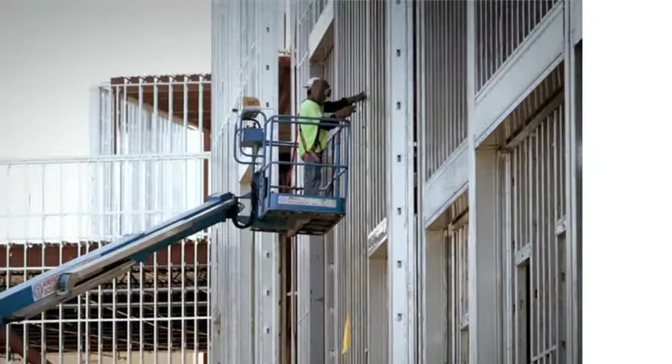Ensuring a safe workplace is a mandated employer responsibility. Under provisions of the Occupational Safety and Health Act, employers must provide workers with an environment free from safety and health hazards. In turn, manufacturing standards for fall protection equipment are established by the American National Standards Institute and the Canadian Standards Association and form the basis for OSHA safety regulations.

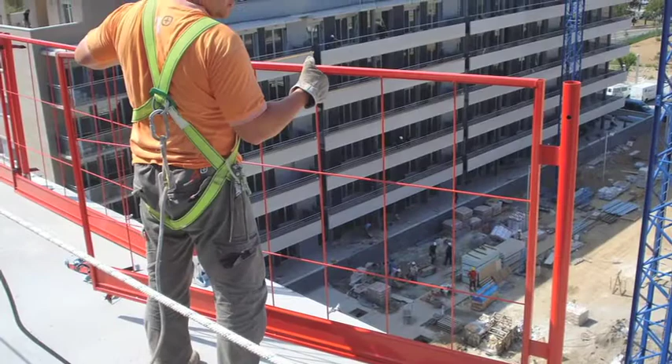Apart from compliance issues, however, the most effective fall protection programs result when employers work closely with workers to identify fall hazards present at a particular site and develop comprehensive safety at height plans and procedures. Even when fall protection measures are in place, it is important to recognize that equipment deteriorates over time, that routine inspection for wear and damage is critical, and that proper training in fall protection and equipment selection are absolutely vital.

A written fall protection safety plan should be created once the specific fall hazards have been identified. The plan should specify what fall prevention or personal protection measures are to be used, and it should also identify who is responsible for implementing the safety measures, including supervision and training. The program needs to be clearly conveyed and understood by all participants.

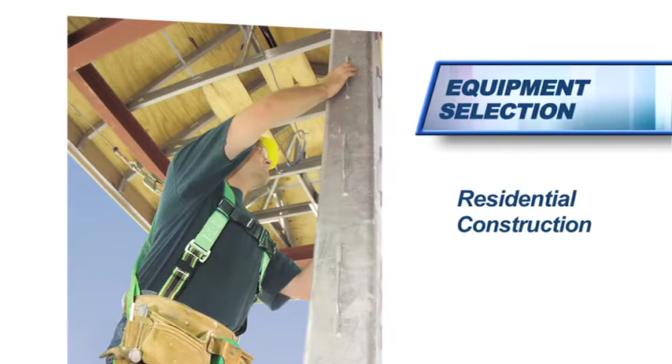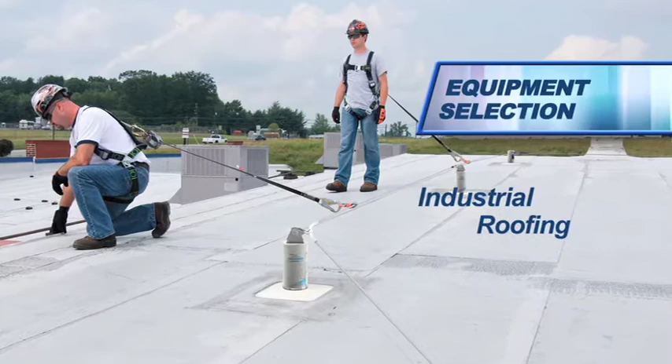Employers should be familiar with the different fall prevention equipment options available and select based on the particular site and type of work being performed. Consultation with safety equipment manufacturers is invaluable in identifying equipment that meets specific worker and job site variables. Because all work environments differ, it is impossible for the manufacturer to determine exactly which safety at height products will provide maximum protection for each job. By understanding how fall prevention and protection equipment operates and knowing the differences in product functions, the employer can select equipment that is best suited for its workers.

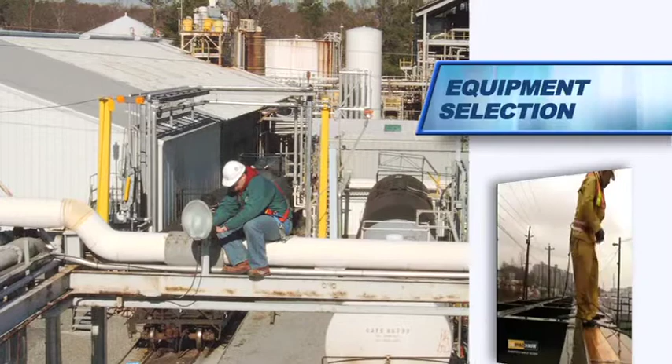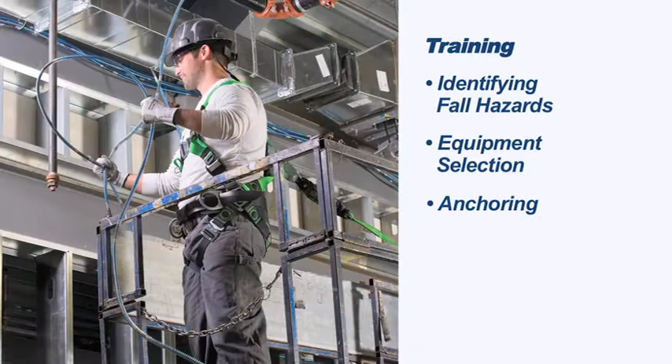Every worker must be trained in the proper use of appropriate fall prevention or personal protection equipment. Training should include identifying fall hazards, selecting appropriate equipment, following proper anchoring procedures, and using equipment properly. Workers should also learn how to inspect and maintain equipment.

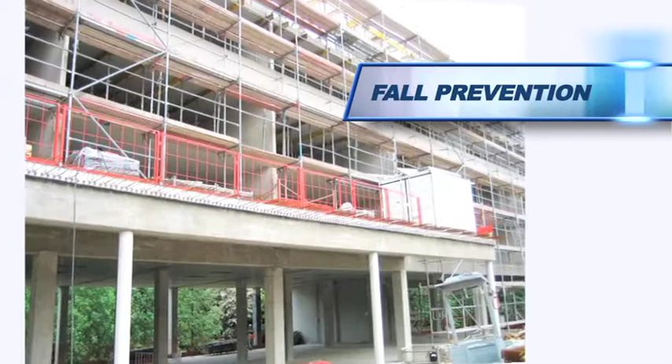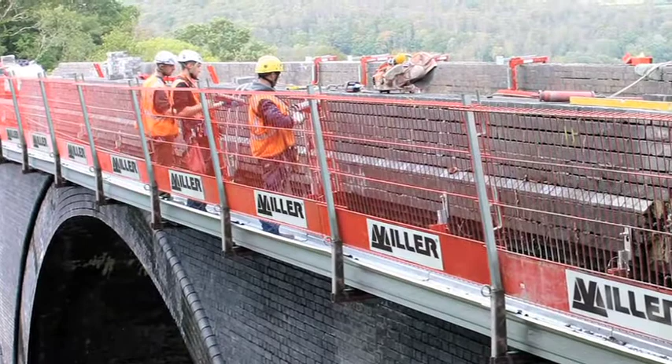Fall prevention, fall arrest, positioning and restraint, suspension and retrieval are the basic categories encompassing types of fall protection equipment. Fall prevention measures entail the installation of permanent or temporary barrier or guardrail systems that simultaneously protect multiple workers. This category of collective systems is typically used in building construction and other elevated areas where workers are exposed to leading edge decks, unprotected roof edges, elevator shafts, floor hatchways, chutes, or wall openings.

Fall arrest equipment, or personal fall arrest systems, is comprised of three components that are often referred to as the ABCs of fall protection. These are anchorage connector, body wear, and connecting device. Used properly, a fall arrest system does not prevent a fall, but rather suspends a worker in the event of a fall and prevents impact with a lower obstruction or the ground.

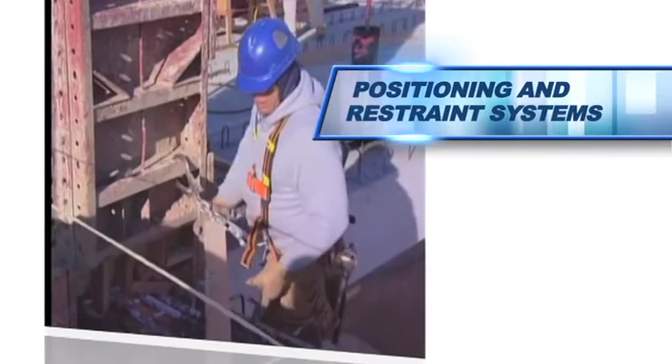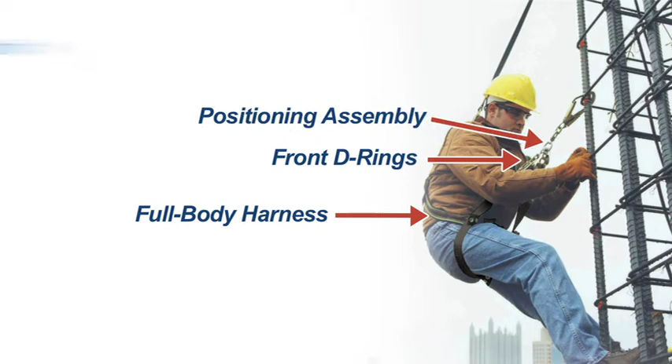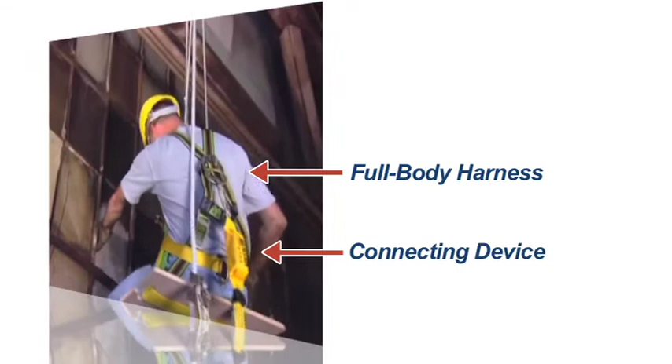Positioning and restraint systems hold a worker in place, allowing a hands-free workspace, or restrict a worker's movement in proximity to a fall hazard. A typical system consists of a full body harness with side or front D-rings, a positioning assembly, and an attachment point. Suspension systems enable workers to be lowered and supported to accomplish hands-free tasks such as building maintenance functions. Typical components include a full body harness, a connecting device or work line, a suspension device such as a chair or sling, and an attachment point.

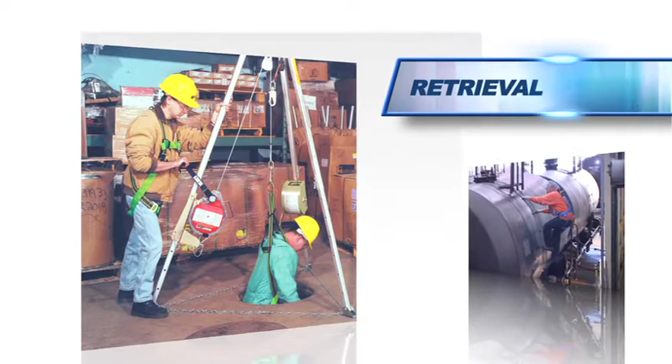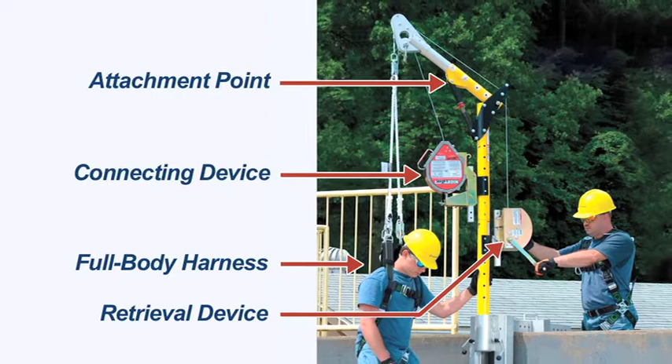Retrieval systems are used in storage tanks, manholes, and other confined space applications. The system includes a full body harness, a retrieval device, a connecting device, and an attachment point such as a tripod or DuraHoist system. The three key components of the personal fall arrest system must be in place and properly used to provide maximum worker protection: anchorage connector, body wear, and connecting device.

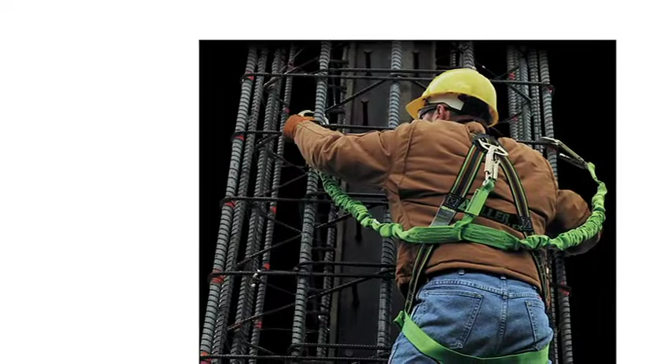An anchor point is a structural item such as an I-beam, scaffold, rebar, or lifeline to which workers are affixed when a fall hazard is present. It is sometimes referred to as a tie-off point. Anchor points must be carefully selected since their strength and stability are depended upon in case of a fall. To avoid a dangerous swing fall, workers should always try to connect and work directly underneath an anchorage point whenever possible.

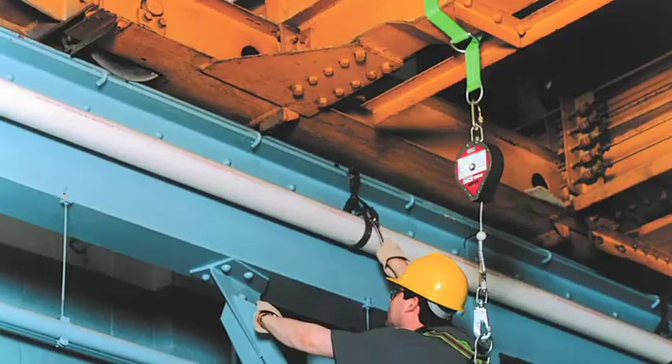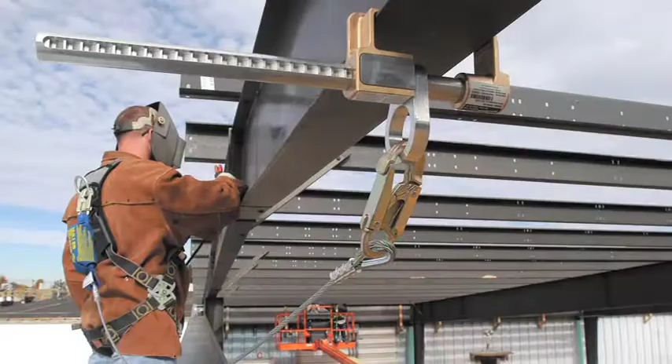An anchorage connector is an intermediary fall protection device, such as a cross-arm strap, D-bolt, or rope grab, that links the worker to the anchor point. Anchorage connectors are offered in a variety of configurations to accommodate vertical or horizontal connections for attachment to concrete substrates, large and small beams or scaffolding, rooftops, and structural steel. Some anchorage connectors are built into connecting devices. These tie-back anchorage connecting devices will be addressed in detail later. The only form of body wear acceptable for fall arrest is the full body harness.

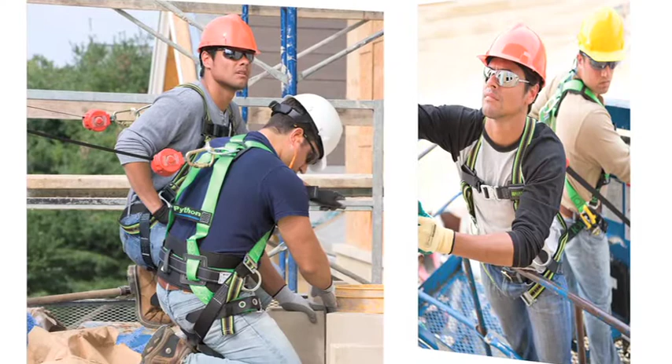The harness style should be selected based on the type of work being performed and the overall work environment. The full body harness offers an inherently high safety factor, since fall forces are distributed throughout the body over many webbing components, including chest, shoulder, waist, and legs.

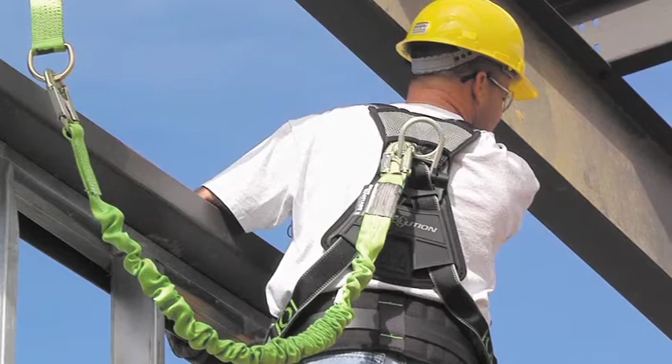In addition to distributing forces throughout the body, a properly fitted full body harness keeps the worker suspended upright while awaiting rescue. This is due to the sliding back D-ring, which slides along the webbing to the back of the neck once a fall occurs. OSHA states that potentially fatal suspension trauma can occur within minutes while waiting for rescue after a fall. Average fall rescue time is 15 minutes.

When used, the Miller Relief Step Safety Device provides support and enhances blood circulation until rescue, permitting the ability to move and flex leg muscles. Small and lightweight, the Relief Step Safety Device attaches to any brand of full body harness. Utilizing 2 Miller Relief Steps, one for each leg, assures greater comfort until rescue is completed.

While safety directors agree a comfortable harness fit is crucial to compliance, some workers lose sight of how important it is to follow directions when it comes to ensuring a snug fit with chest and leg strap adjustments and back D-ring positioning. In order to ensure proper protection, the full body harness must be worn properly. A simple 6-step guide can be followed that could save your life.

Hold the harness by the back D-ring and shake to allow any tangled straps to fall into place. Unbuckle chest, leg, and waist straps. If the harness has a belt, unbuckle it too. Slip the straps over the shoulders so the back D-ring is located in the middle of the back between the shoulder blades. Pull the end of one leg strap between the legs and secure to the opposite end. Repeat this step with the other leg.

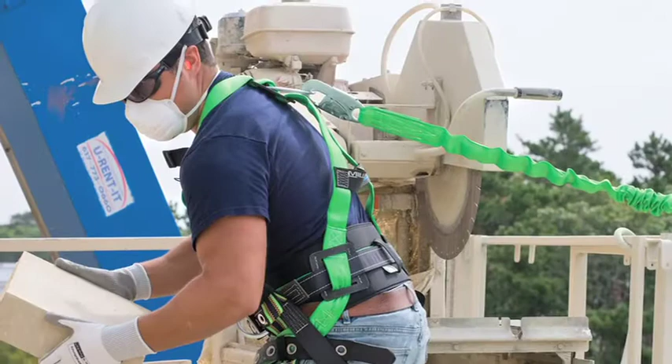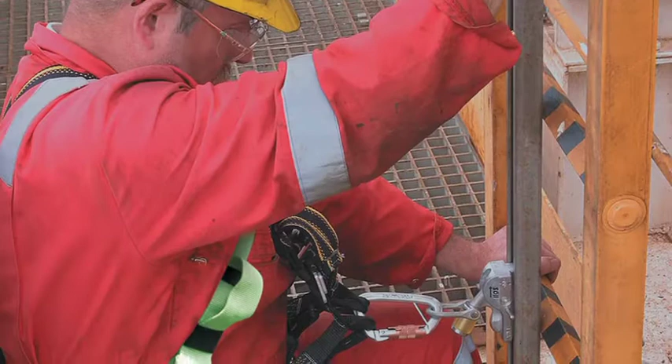Appropriate harness sizing influences compliance. Manufacturers offer various sizes as well as an array of styles for specific industries or activities. Side and front D-rings are typically used for positioning only. However, front D-rings or web loops can be used for ladder climbing and rescue.

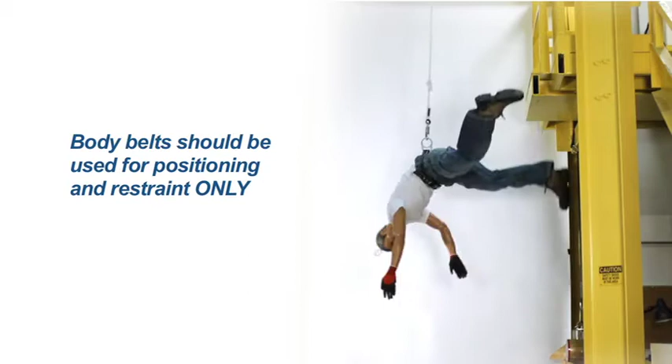Body belts should be used for positioning and restraint only. Most regulations prohibit their use for fall arrest. Body belts do not distribute fall forces, but concentrate arresting shock in the abdomen, resulting in serious internal injuries.

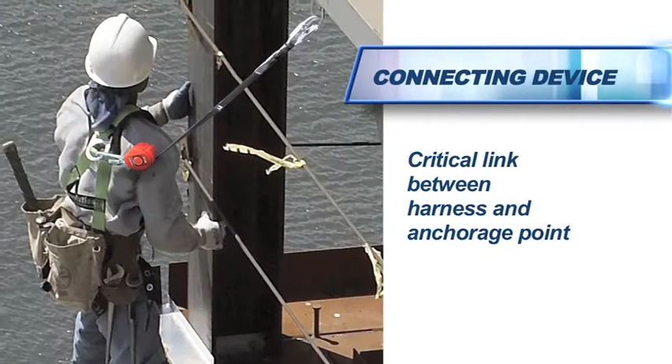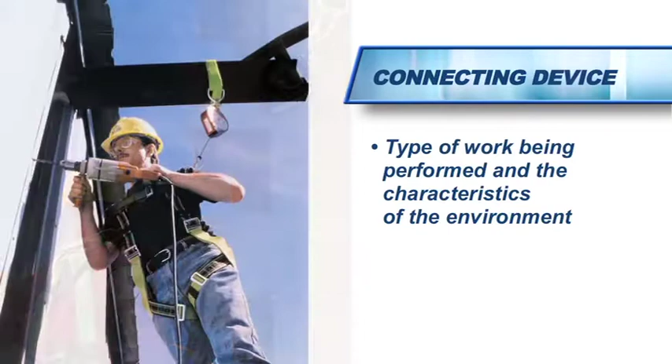A connecting device is the critical link between the harness and the anchorage point. The connecting device manages the greatest forces during a fall. Connecting devices should be selected according to these criteria: type of work being performed and the characteristics of the environment, such as the presence of moisture, dirt, oil, grease, and electric hazards, as well as the ambient temperature.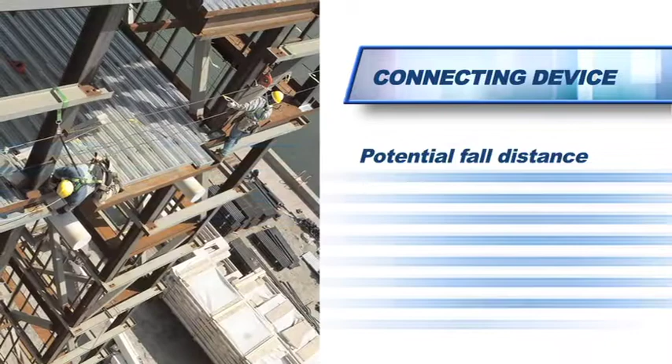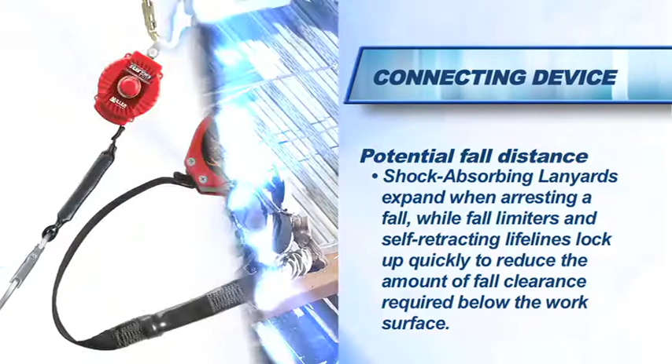Potential fall distance. Shock-absorbing lanyards expand when arresting a fall, while fall limiters and self-retracting lifelines lock up quickly to reduce the amount of fall clearance required below the work surface. A personal fall arrest system should be designed and tested as a complete system. Components produced by different manufacturers may not be interchangeable or compatible.

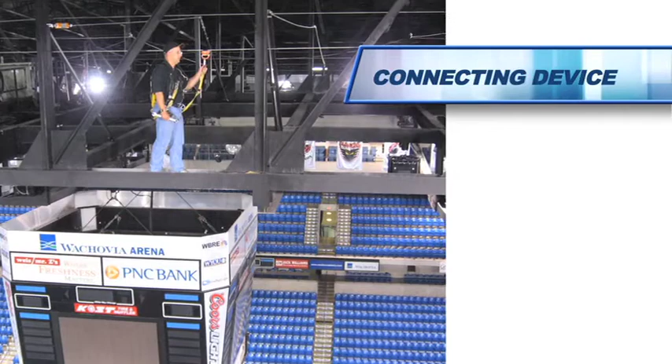Selection criteria should also include a close look at product quality. For example, OSHA regulations call for limiting fall forces on an individual wearing a full body harness to 1,800 pounds. Most reputable lanyard manufacturers state maximum arrest force on the label of the lanyard.

While OSHA regulations are the law and are enforced by a federal agency, ANSI standards are self-enforced by individual manufacturers. There is no enforcement body and no inspectors. The buyer cannot take stated performance per ANSI guidelines for granted. Always check with the manufacturer for documented proof.

When attaching the connecting device to the harness, attach to the back D-ring only. If other D-rings are integrated on the harness, their use is for positioning or restraint. Shock-absorbing lanyards are required for a fall arrest system. Non-shock absorbing lanyards are for positioning and restraint only.

While both will arrest a fall, the maximum arresting forces when used together with a full body harness need to be less than 1,800 pounds. This is extremely difficult to achieve using a lanyard without a shock absorber. A test fall of a 220-pound mannequin dropping 6 feet with and without a shock absorbing lanyard demonstrates the forces on the body.

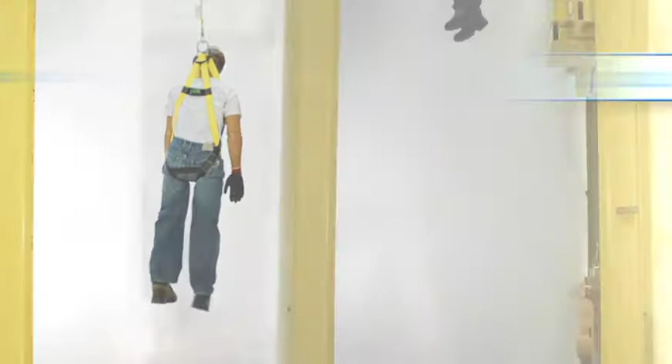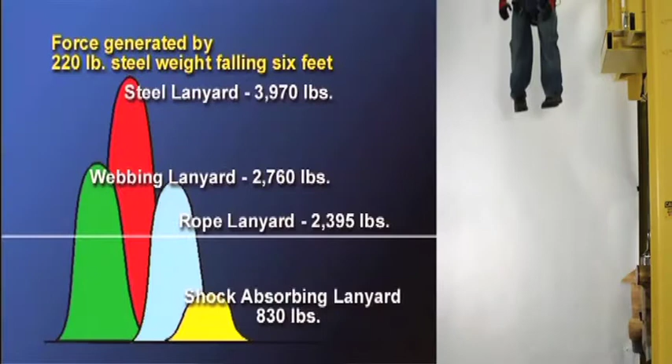Without shock absorption, forces exceed 3,000 pounds, causing the head to snap back and the body to bounce at the instant of arrest. With a shock-absorbing lanyard, deceleration is much smoother and more controlled, and fall forces are contained to 900 pounds.

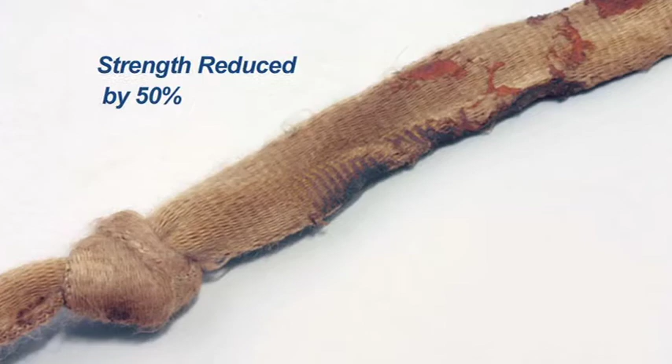Shock-absorbing lanyards feature pack or tubular designs, specially woven inner cores that smoothly expand to reduce fall arrest forces. Lanyards are available in steel, rope, and webbing. Never tie a knot in any web or rope lanyard. It reduces the strength by 50%.

Double-leg shock-absorbing lanyards provide 100% tie-off fall protection. If one leg is not used, it should be connected to a pull-free lanyard ring on the harness and never be attached to any permanent fixture on a harness such as a side D-ring. All Miller brand harnesses include pull-free lanyard rings, designed for storing a lanyard or extra lanyard leg when not in use.

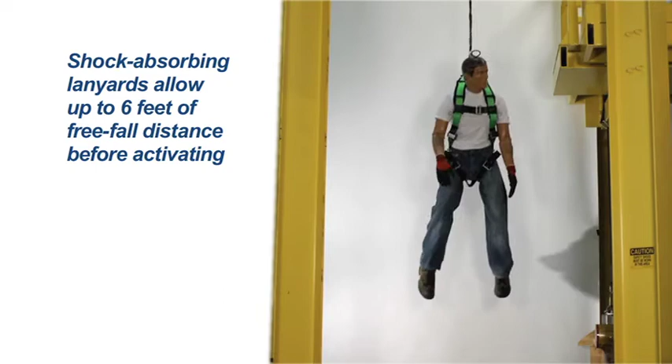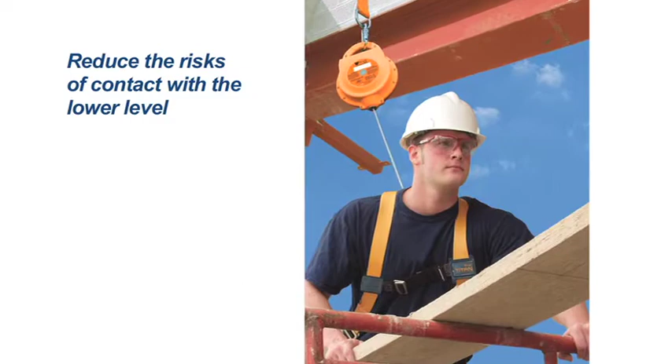Fall limiters and self-retracting lifelines, sometimes referred to as retractables, yo-yos, and seat belts, are approved alternative connecting devices to shock-absorbing lanyards. While traditional shock-absorbing lanyards allow up to 6 feet of free fall distance before activating, self-retracting lifelines require less than 2 feet. Shorter activation and arrest distances reduce the risks of contact with the ground or lower level obstructions and allow for easier rescue in the event of a fall.

Fall limiters and self-retracting lifelines are available with working lengths ranging from 6 to 175 feet. Self-retracting lifelines are durable, heavy-duty devices that have webbing or cable wound on a brake drum that extends as the worker moves away from the anchor point and retracts as he nears the anchor point.

Personal fall limiters are lightweight web connectors that require less fall clearance and offer optimal mobility while preventing tripping hazards. They may be attached directly to the back D-ring or used as a traditional retractable lifeline. Double leg units are also available for 100% tie-off fall protection.

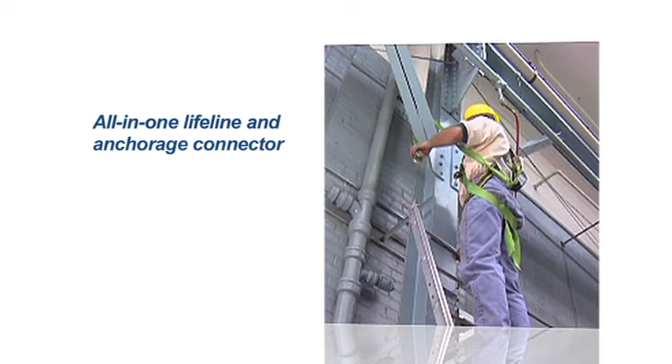Tie-back lanyards are a type of connecting device available as a lanyard or personal fall limiter that have a special snap hook and high-strength webbing that is designed to tie back anywhere along the lifeline. This all-in-one lifeline and anchorage connector increases safety and reduces equipment required on the job site. Only special snap hooks and webbing designed for use with tie-back lanyards are acceptable.

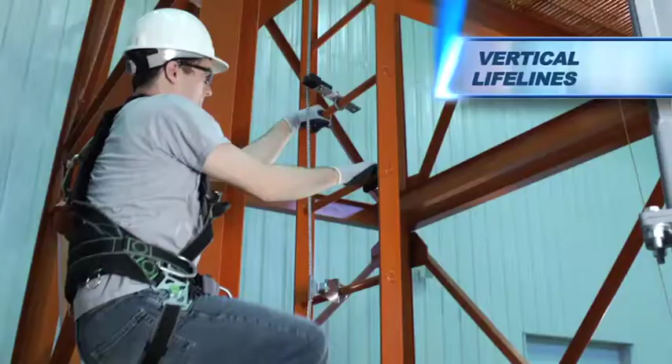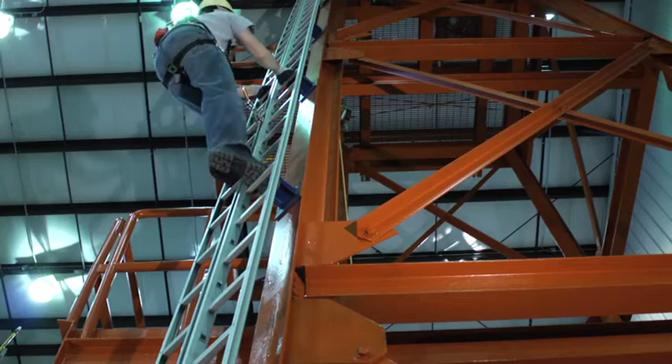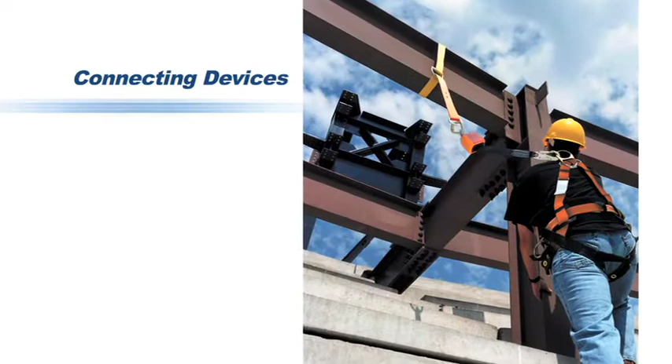Vertical lifelines are connecting devices available as rope or cable and used in conjunction with rope or cable grabs. These grabs are designed for hands-free operation, easily sliding up or down a lifeline as the worker moves, but instantly locking in place in the event of a fall. Common applications include roofing, window washing, and fixed ladder climbing. Connecting devices are the most critical components in surviving a fall and must be carefully chosen, properly used, and routinely inspected to ensure optimal performance and worker safety.

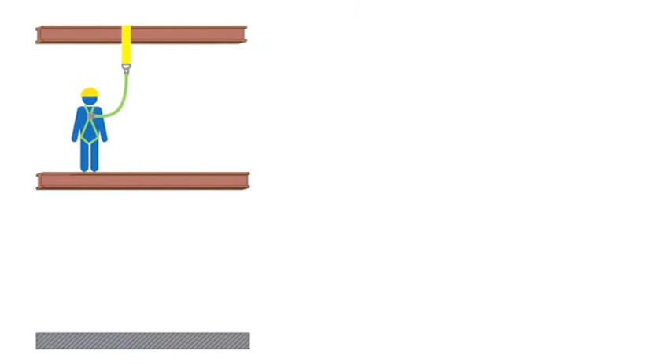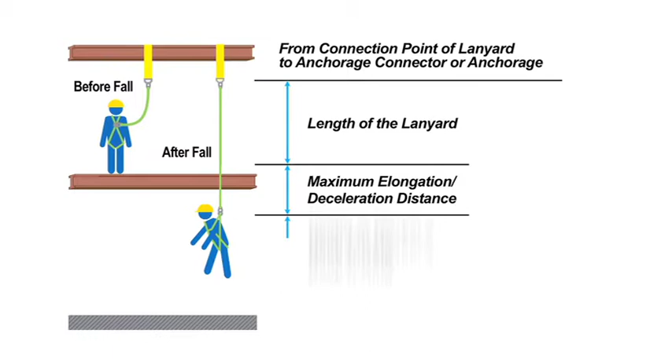Fall clearance calculations are vital in selecting proper anchorage points and connecting devices, and to avoid striking a lower level or obstruction in the event of a fall. Free fall distance should be limited to the shortest distance possible. This is never more than 6 feet when using a shock-absorbing lanyard, unless using equipment designed specifically for free falls over 6 feet. When calculating fall clearance required for a shock-absorbing lanyard, the following variables must be considered: the original length of the lanyard, the maximum elongation after shock absorber deployment, the height to the worker's back D-ring, and a safety factor of 3 feet.

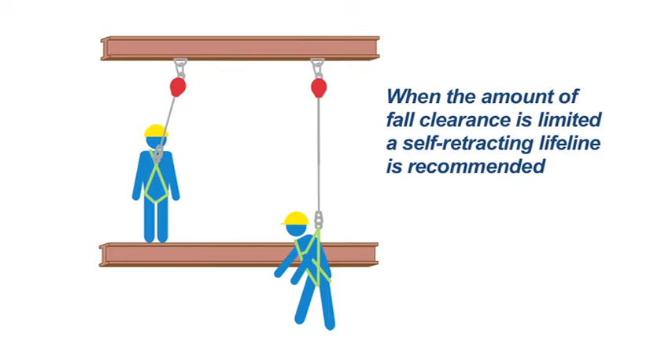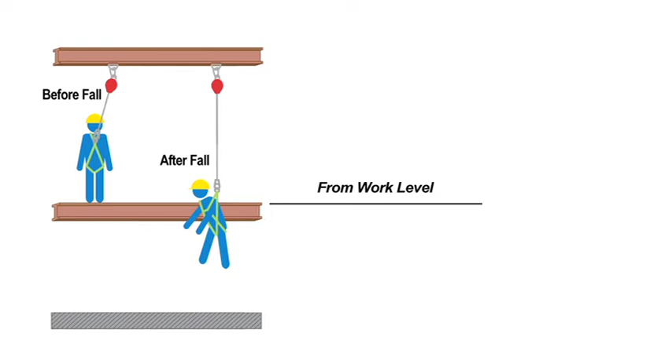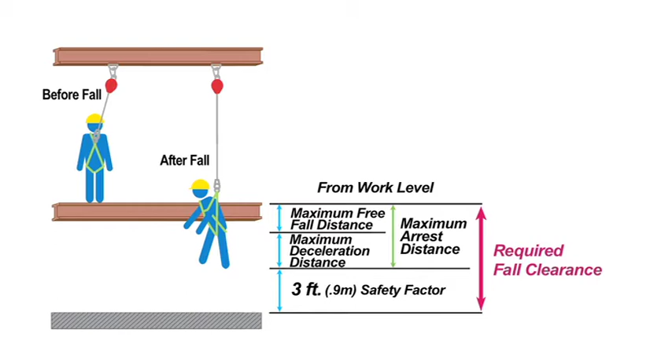When the amount of fall clearance is limited, a self-retracting lifeline is recommended. Some retractables require as little as 5 feet of fall clearance from the work surface to the next lower level or obstruction. While fall clearance is calculated from the anchorage point for a shock-absorbing lanyard, fall clearance for a self-retracting lifeline is often calculated from the work level. When calculating fall clearance for a self-retracting lifeline from the work level, the following must be considered: maximum fall arrest distance and a safety factor of 3 feet. Always know your fall clearance when selecting your connecting device.

To maintain service life and high performance, each harness and connecting device should be visually inspected before each use and regularly inspected by a competent person as defined by OSHA. Following these instructions may still necessitate removing the harness or connecting device from service prior to the expiration of the 5-year life expectancy guideline. Likewise, proper adherence to the inspection and maintenance criteria may extend the useful life beyond 5 years. Ultimately, it is the responsibility of the end user to determine when a harness or connecting device is unfit for use and should be removed from service. When not in use, products should always be stored at room temperature, away from chemicals, moisture, and ultraviolet light.

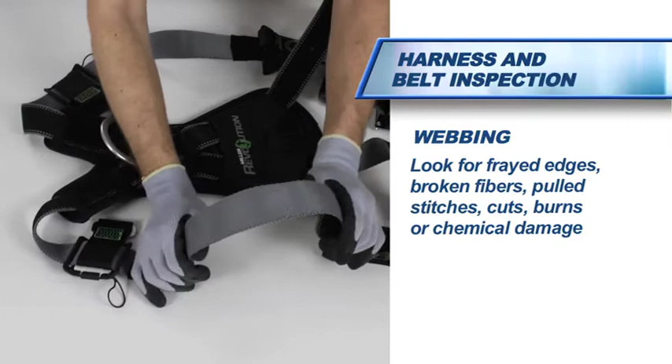To maintain proper service life and high-performance fall protection equipment, anchorage connectors, body wear, and connecting devices must be inspected regularly. Grasp the harness webbing with hands 6 to 8 inches apart. Bend the webbing in an inverted U as shown. Surface tension on the webbing will reveal damaged fibers or cuts. Follow this procedure for the entire length of the webbing on both sides, looking for frayed edges, broken fibers, pulled stitches, cuts, burns, or chemical damage.

Check the D-rings and other metal parts for corrosion, distortion, cracks, breaks, and rough or sharp edges. The D-ring should pivot freely. Inspect for any unusual wear, frayed or cut fibers, or broken stitching of the D-ring attachments. Pads should also be inspected for cracks, excessive wear, or other signs of damage. Inspect buckles for unusual wear or distortion, fibers around buckle attachments, or distortion.

Mating and friction buckles should not be bent or distorted. The outer and center bars must be straight. Tongue buckles should be inspected for heavy wear, especially loose, broken, or distorted grommets. Webbing should not have additional punched holes. The tongue should overlap the buckle frame and move freely.

Quick connect buckles must be free of debris and engage properly. The outer and center bars must be straight. Inspect fall arrest indicators located on the back D-ring pad for signs of activation. Remove from service if broken or stretched between any of the pairs of arrows.

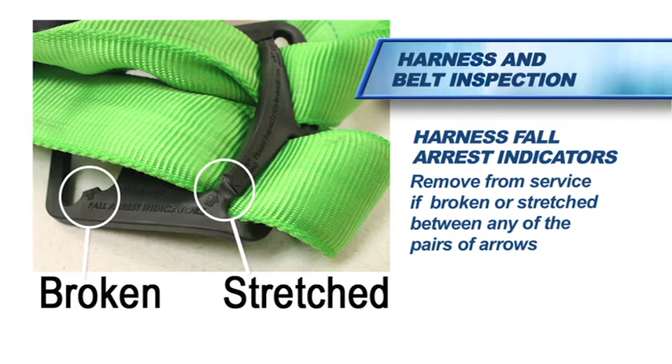When inspecting lanyards, work from one end to the other using a slow rotation. Check snap hooks for cracks, corrosion, or distortion. Keeper springs must have sufficient force to close firmly. The snap hook locking mechanism should keep the hook's gate securely locked.

Thimbles must be firmly seated in the eye of the splice, not displaying any loose or cut strands. There should be no sharp edges, distortion, or cracks around the edges of the thimble. Always wear gloves when inspecting a wire rope lanyard. While rotating, watch for cuts, frayed areas, or unusual wearing patterns on the wire.

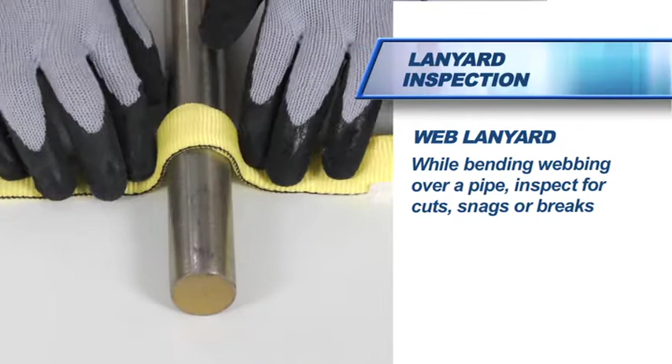While bending webbing over a pipe, inspect for cuts, snags, or breaks. Swelling, discoloration, cracks, and charring are obvious signs of chemical or heat damage. Look closely for any breaks in stitching and inspect the lanyard warning flag for signs of activation.

When inspecting a rope lanyard, rotate the entire length while looking for fuzzy, worn, broken, or cut fibers. Diameter of the rope must be uniform. Outer portions of the pack should be examined for burn holes and tears. Stitching at attachment points must be free from loose strands, rips, deterioration, or other signs of activation.

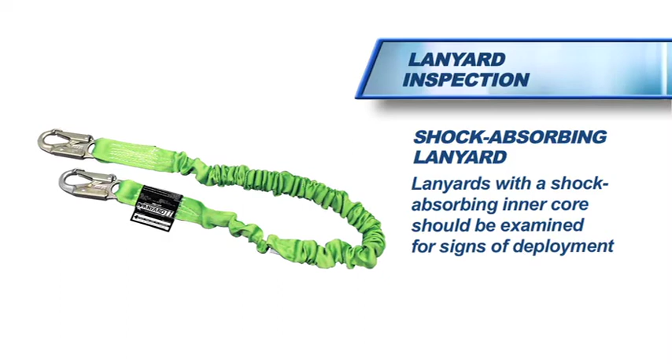Lanyards with a shock-absorbing inner core should be examined for signs of deployment. A warning flag will indicate if the product has been used to arrest a fall. If the flag has been activated, it must be removed from service.

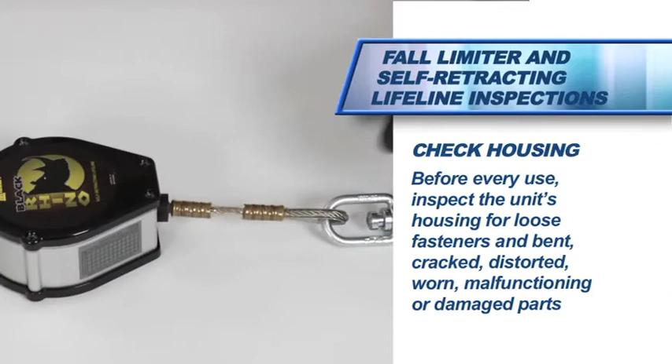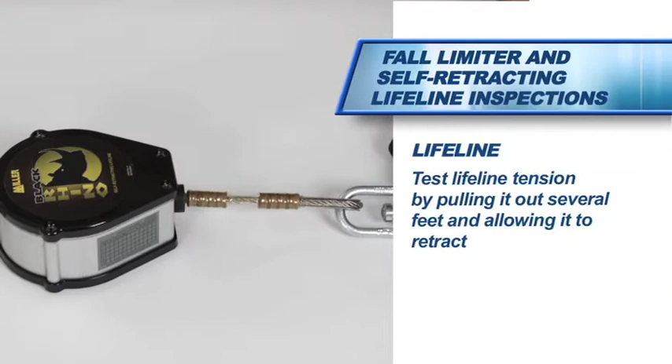Before every use, inspect the unit's housing for loose fasteners and bent, cracked, distorted, worn, malfunctioning, or damaged parts. Test lifeline tension by pulling it out several feet and allowing it to retract. The lifeline should pull out freely and retract all the way back into the unit. Do not use the unit if the lifeline does not retract.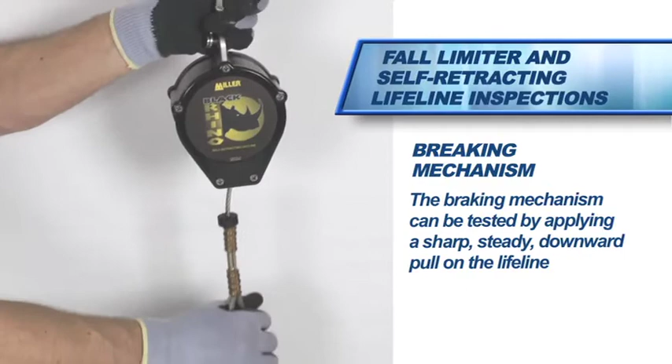The lifeline must be checked regularly for cuts, burns, corrosion, kinks, frays, or other signs of wear. The braking mechanism can be tested by applying a sharp, steady downward pull on the lifeline. There should be no slippage, and when tension is released, the brake should disengage and the lifeline should retract into the housing. Do not use the unit if the brakes do not engage.

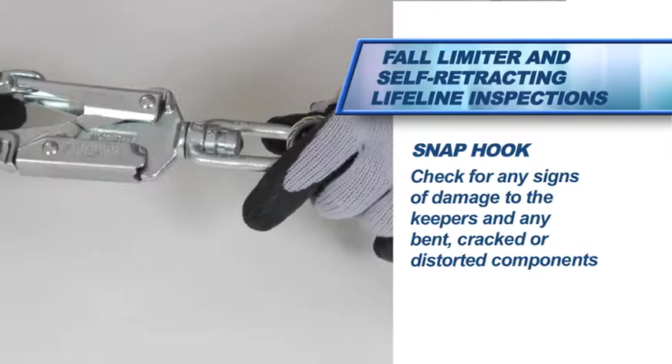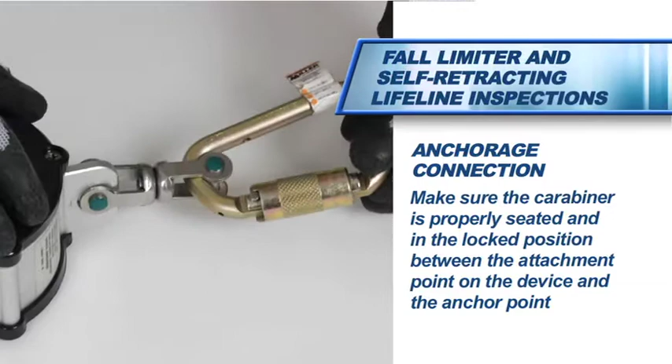Make sure the snap hook locks and the swivel operates smoothly. Check for any signs of damage to the keepers and any bent, cracked, or distorted components. Make sure the carabiner is properly seated and in the lock position between the attachment point on the device and the anchor point.

Each year, hundreds of thousands of injuries and deaths are attributed to work-related falls. The good news is that with the proper fall protection equipment and training, these tragedies can be prevented. Fall prevention in the workplace begins with a commitment to safety. Both management and employees must be thoroughly committed for a fall protection plan to be effective.

Understand all applicable OSHA regulations and ANSI and CSA standards regarding fall protection before using equipment. Take the time to ensure your workplace is a safe place. Identify possible fall hazards. Be committed to safety. Develop a fall protection plan and provide proper training. Fall protection equipment should be used only after proper training from a competent person.

Employers should provide training for prompt rescue should a fall occur. Rescue procedures should be reviewed as a part of the company's regular safety training program. Read all instructions and warnings contained on safety products and in the packaging before using any fall protection equipment. All fall protection equipment should be carefully inspected before each use. If any damage is detected, the equipment should be removed from service.

Attach in a manner which will limit a free fall to the shortest possible distance and make sure there is adequate fall clearance in the event of a fall. Use only the back D-ring on a full body harness for fall arrest. Other D-rings are for positioning and restraint only.